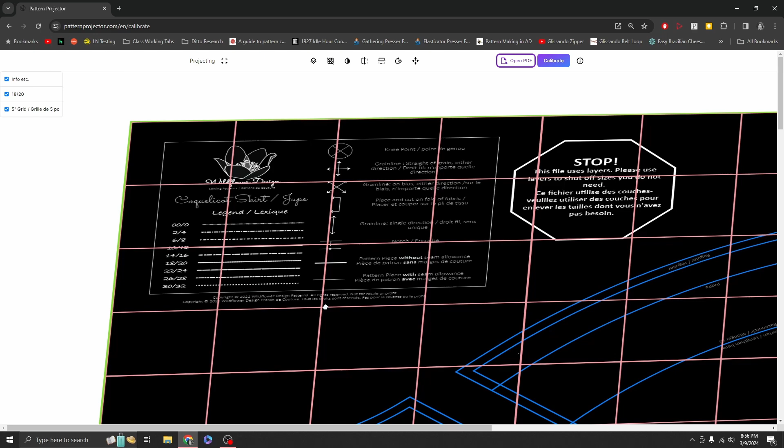Once you've got this calibrated, you click the project button, and then you open a PDF. Once you have opened it, you will be able to move around your file.

You've also got right here layers that you can turn on and off. You can hide the layer menu or show it. You can turn that calibration grid on and off. You can invert colors.

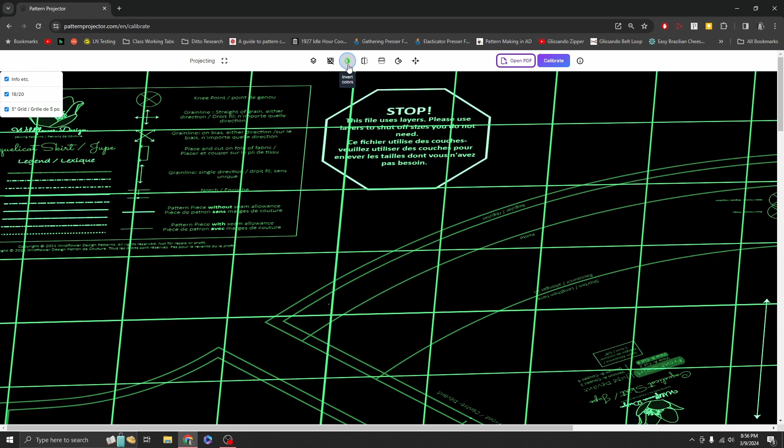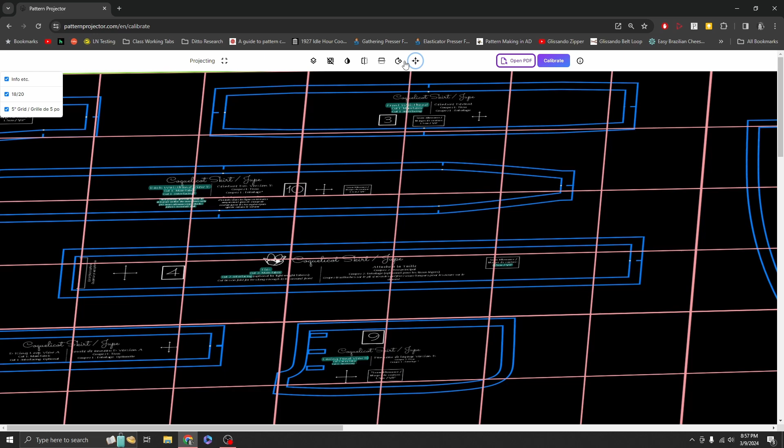You can flip horizontally, vertically, and you can rotate. Now, when you rotate, you do tend to lose it, and then you have to come and find it, which I find a little bit annoying. But that's a small annoyance. You can also recenter, so if you do turn it and lose it, you can recenter it.

And if it's multiple pages, you've got pages that you can scroll through up here, or you can go back to the calibration. So that was a super quick overview. Now let's see it in action.

If you've seen my previous video about Project and Cut, then this setup is going to look extremely similar. I've set my old 455 on the floor. It is sitting there, not square to the mat, and not level on the floor.

It has one of those bubbles on the bottom that keeps it from sitting levelly, it's just sort of propped there. You can tell by the angle of the light right here, especially compared to the straightness of my mat, that it is not properly aligned at all.

Now we're going to use that and not touch the projector, and calibrate this setup so that I can project a pattern. So it's very similar to what we've done before.

We're going to grab this corner. This one is purple, and we're going to pull it to... I can't quite get it to the corner of my mat because of the thing, so I can actually hit this button to go full screen, I believe.

This button to go full screen. There we go. I can hit that button to go full screen, and that will allow me to go all the way to this corner. So I can get that pretty close to that corner, and then I'm going to grab the next corner, and right now I am using my mouse.

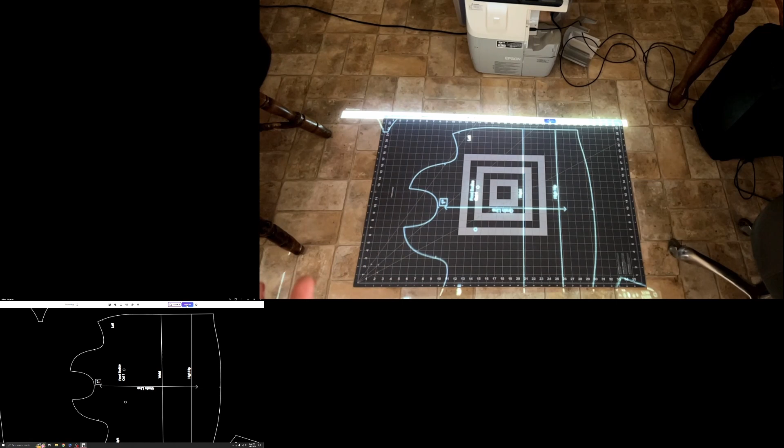Now, I will do a video that shows attempting to use this with an iPad wirelessly. I will do a video that compares Project and Cut with Pattern Projector, and we can talk about in which instances you might want one or the other. But as far as showing you how Pattern Projector works, I believe there's not much else I can show you.

Editing Brandon is back. It's a little later, my hair is a little drier. And this is also coincidentally the third time I've recorded this because I keep doing it wrong and forgetting to actually hit record or have audio. So let's try again, shall we?

Okay, so I said very confidently that's all I can show you—I was wrong. Improvements have already been made. Remember, this is free open source software, so improvements are always being made and things are always being added. What I'm fixing to show you is really cool, but I've also found a few buggy things that don't work great.

So let's look at it. The calibration part hasn't really changed, but if we look at the projector part, some stuff has changed.

Let's open a PDF. I'm going to start by showing you this because it's pretty cool. I'm going to scroll, and it kind of shows you both things. First of all, you can see there are layers as an option now. And as of recording this video, Project and Cut just added that as well. So that's not unique to Pattern Projector, but it is super handy. All right, so what is unique at the time of recording to Pattern Projector is this bit.

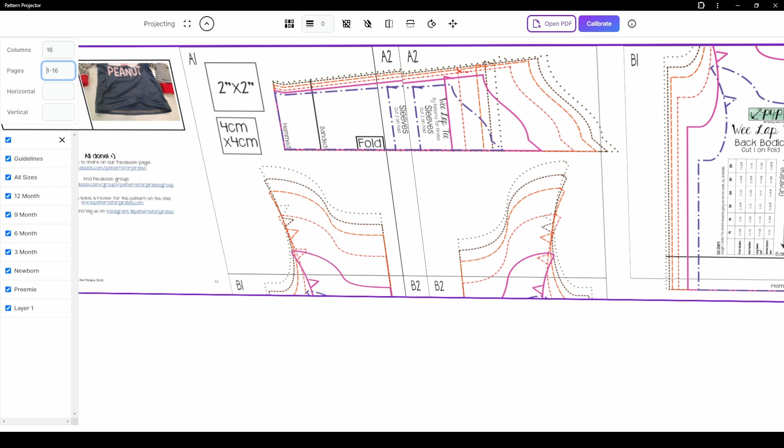We actually heard Courtney talk about this when she came on the channel. We are going to do a visual stitching of this pattern. So this pattern, or these instructions, end on page 12. So the pattern starts on page 13. I'm going to do that. And through the fact that I've done this twice before already, I know if I change that column to 1, we'll actually be able to see this. Oops, well this is not right. 13 through 16, how about that?

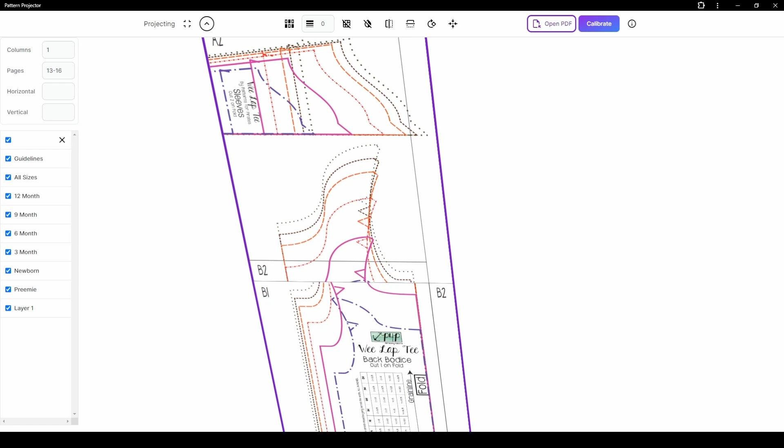Okay, so now we can see this pattern in its glory here, but it is not stitched together. So to get it stitched together, I can see this is an A, this is an A, this is an A, then we switch to B. Okay, so because of the way I know Patterns for Pirates patterns, I know that means I'm going to have - oops, that's the wrong button - I know I'm going to have 2 columns, 2 rows, okay? So now this is correct. All these puzzle pieces are in the correct place, but they're not put together yet.

So this is where this really cool thing comes in. You up the horizontal until those all line up, and I can go too far and then bring it back - optimized. That is a quote from Sheldon from the Big Bang Theory. And then I can do the same thing vertically. Oop, again. There we go, all right. So that is now put back together, or put together exactly the right way.

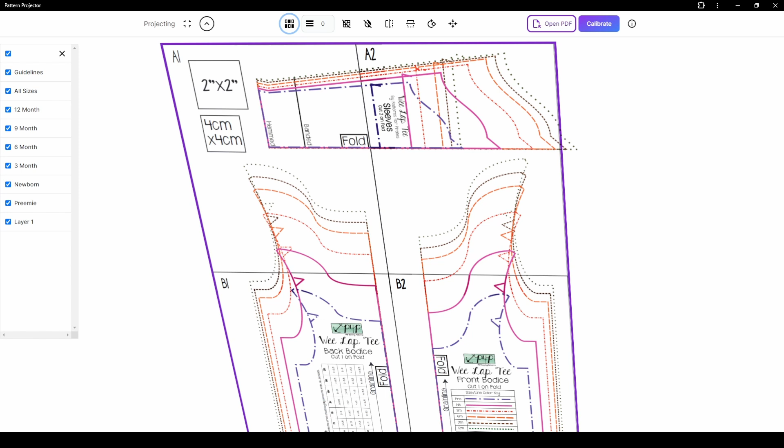It's great. Okay, we can also play, and I can hide this too if I want to now. We can also play with the layers. So let's turn them all off. And then let's bring in that layer, and the all sizes layer, and the preemie layer.

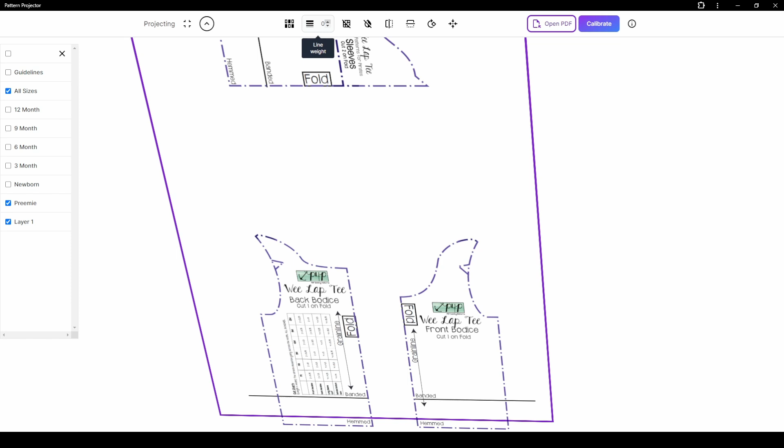Cool, let's say this is hard to see on my projection. I can up the line weight, which is awesome. It also automatically turns it black when you do that, which you can then invert, which would be a little bit easier to see. But it does not change it to a solid line, which I find more helpful than changing the color, especially because I cut on a lot of black. Although again, in that case, you can invert it and fix that problem.

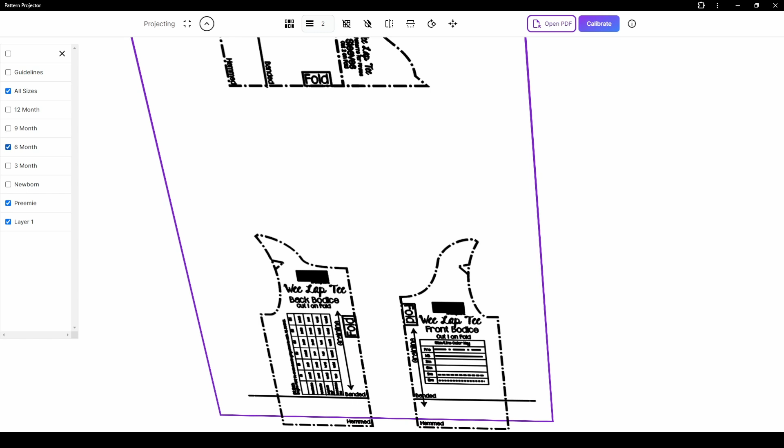I've also noticed on this pattern, if you add another layer in, it does not show if you have adjusted the line weight. But if you put it back to normal, it does, which makes grading rather impossible. However, I have done this on some other patterns and it works with 2 layers. So it may depend on how the designer creates the pattern. Not really sure how that works.

This is all I've got for the improvements that have already happened as of recording. But again, this is an open source software that is constantly changing and evolving.